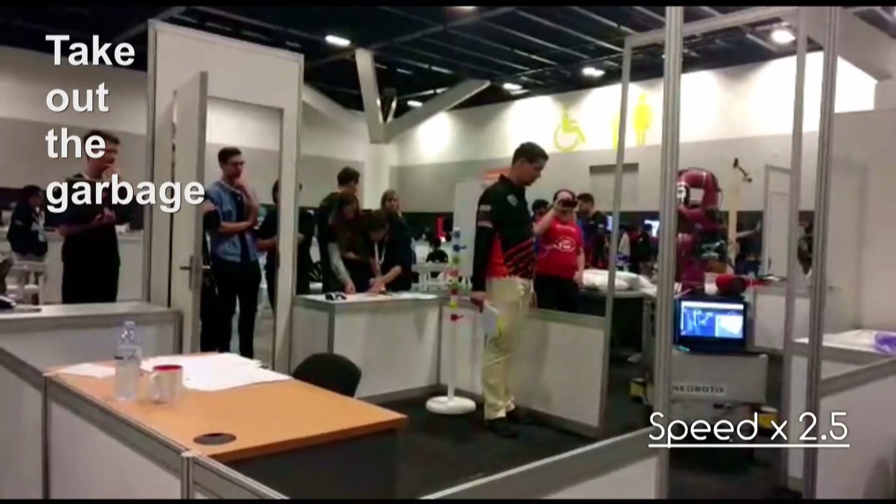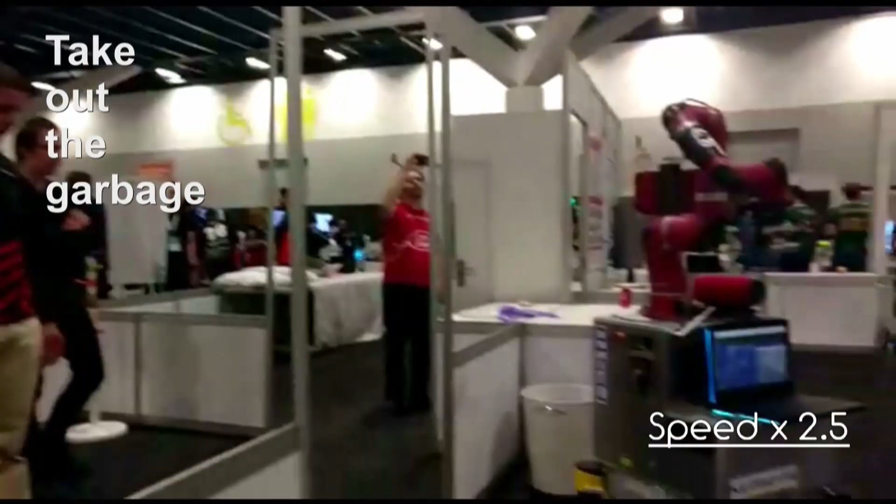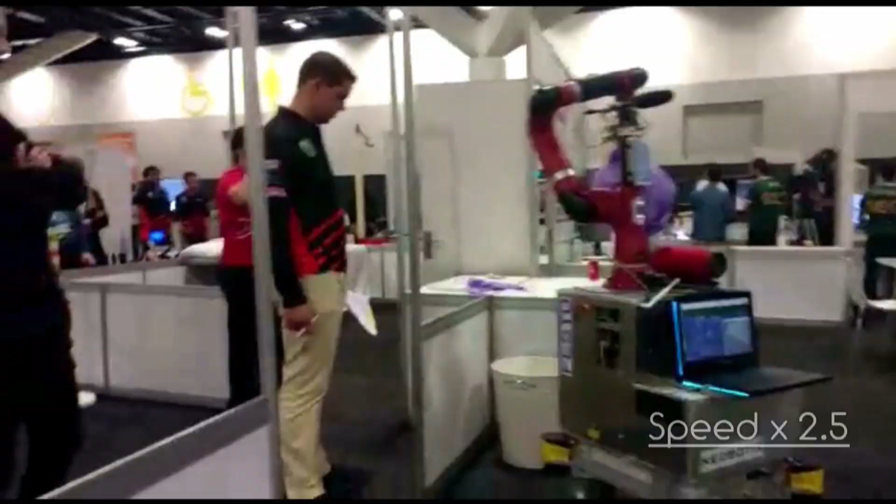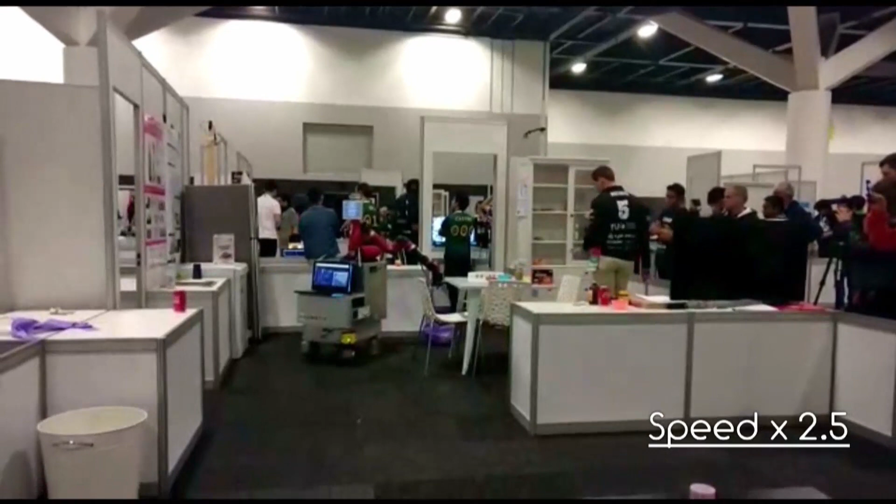This video was recorded in 2019 during the RoboCup World Cup in Sydney. Although our robot dropped the garbage once, he managed to recover from the failure and completed the task successfully.

The next task is carry my luggage, from the same competition.

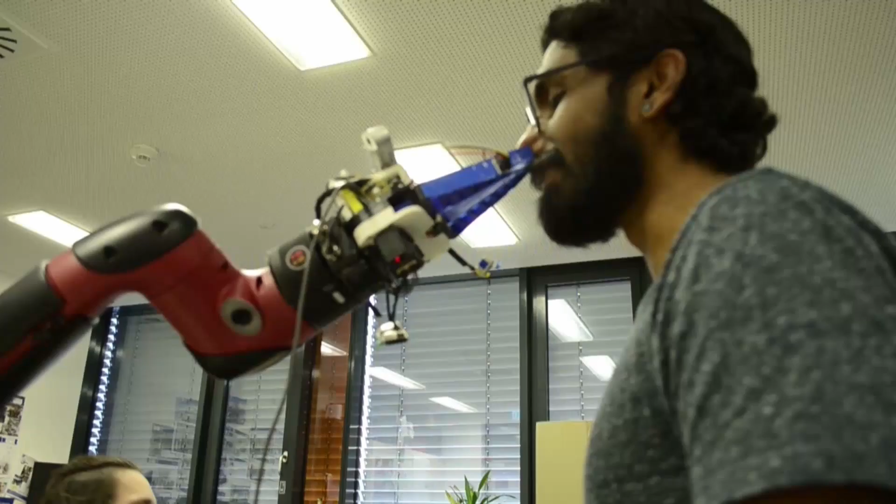Come on. Yeah. You did it. Awesome. Not yet. So you want to follow me, huh? I can push it back. Yeah, you have to push it back. Okay, 1, 2, 3. Give me back my nose!

I can follow you. Please stand about 1.5 meters in front of the robot. Are you ready? Then say yes. Yes. I will follow you now. Please start walking.

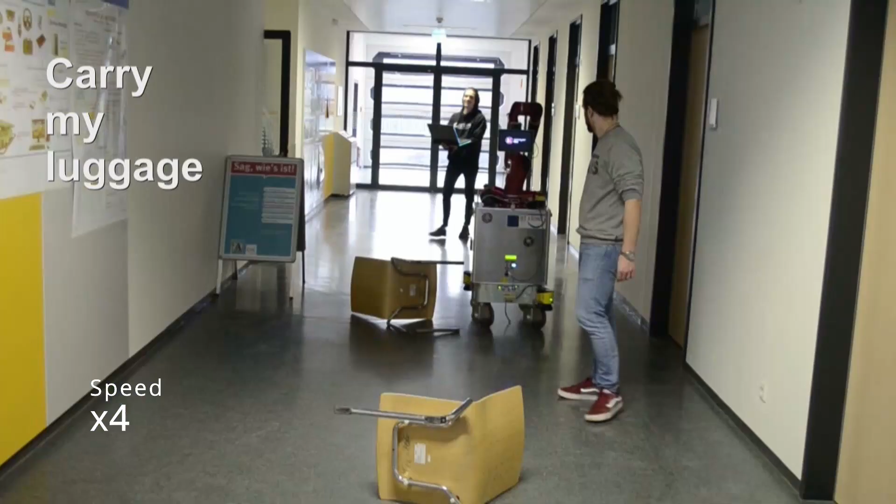Nice answer. Please answer with yes or no, and speak loud and clearly. Follow you. Please stand about 1.5 meters in front of the robot. Are you ready? Then say yes. Yes. Okay, I will follow you now. Start walking.

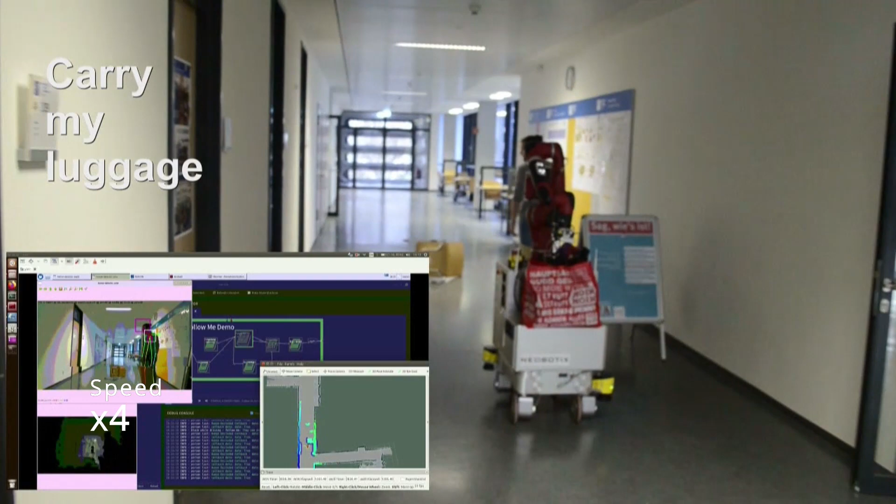Again, we kind of had some problems. The upside is there are enough things for us to optimize for RoboCup 2022 in Bangkok. In the next clip, you can see the Where Is This challenge.

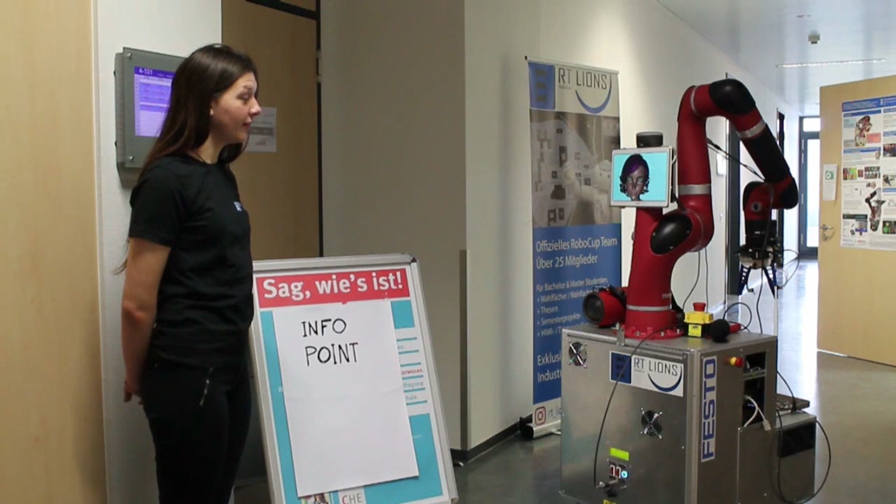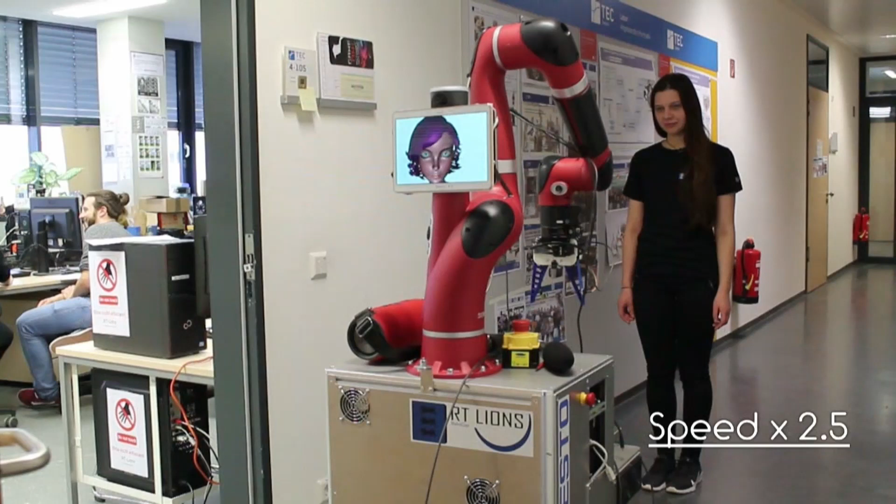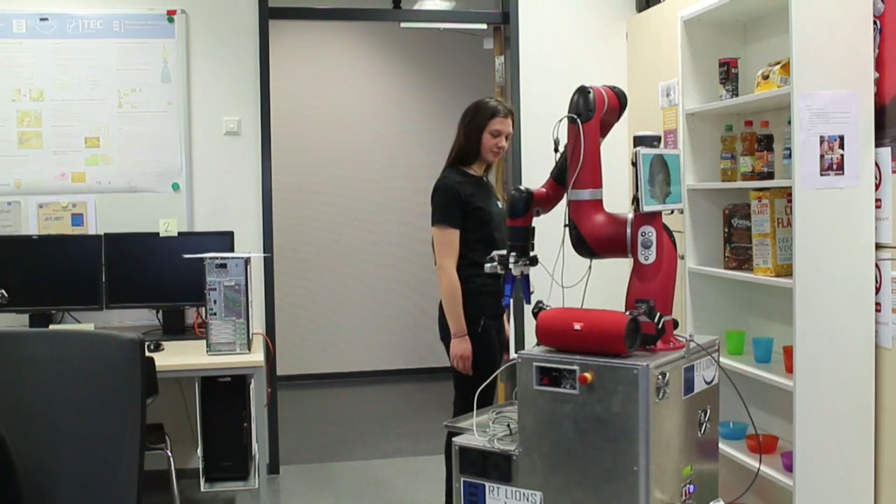Hello, my name is Leonie. Please tell me your name. My name is Carmen. Hello, Carmen. How can I help you? Where are the cornflakes? Please follow the hallway to the next door, on the right side. Then enter the door to the RoboCup room. There will be a shelf on the left side. The cornflakes are placed inside the shelf. Do you want me to guide you to the cornflakes? Yes. Please follow the hallway to the next door, on the right side. Enter the door to the RoboCup room. Ja. There will be a shelf on the left side. The cornflakes are placed inside the shelf.

Now, Michael will tell you something more about our team.

Hi, my name is Michael Denner, a team member of the German RT Lions RoboCup-at-Home team and research staff at the Department of Technique of the Reutlingen University. I would like to take 5 minutes to present our RoboCup-at-Home research poster.

In the beginning, there are 5 departments at our RoboCup team. The navigation team is for moving the robot from one place to another. Second, the manipulation workers teach the picking and placing of all kinds of objects. Then there's the perception team that uses cameras, microphones and speakers to interact with the environment. All modules are connected by the people working on the brain. This abbreviation stands for the best Reutlinger artificial intelligence network ever built. Finally, the assembly operators invent new hardware and maintain our robots.

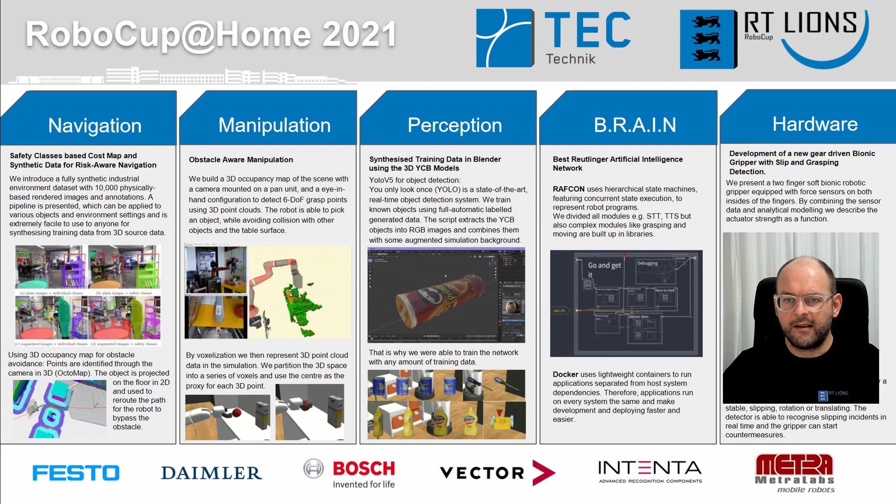Let's start with our research in navigation. For collision and obstacle avoidance, as well as trajectory planning, robots usually generate and use a simple 2D cost map without any semantic information about the detected obstacles. Thus, a robot's path planning will simply adhere to an arbitrary large safety margin around obstacles. A more optimal approach is to adjust this safety distance according to the class of an obstacle.

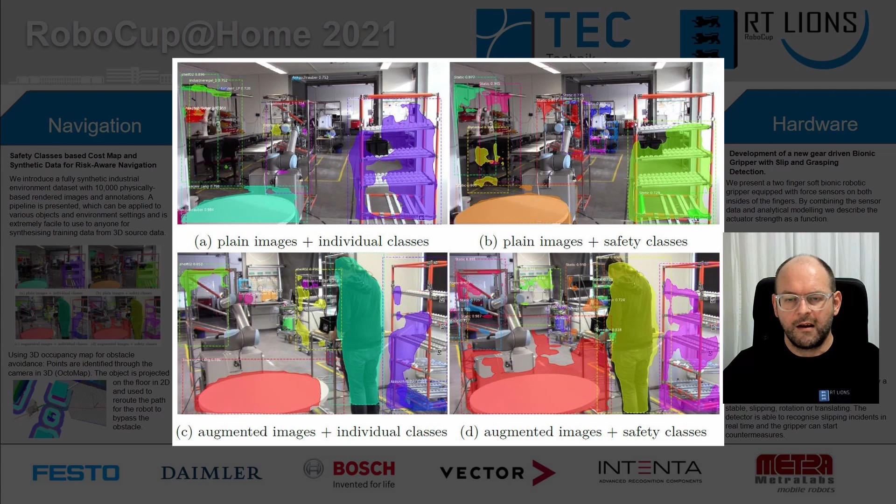For class prediction, we trained an image processing convolutional neural network. One of the main problems in the development and training of any neural network is the creation of a training dataset. We used methods and free open source software allowing a fast generation of annotated datasets. Our pipeline can be then applied to various objects and environment settings and is extremely easy to use for anyone synthesizing training data from 3D source data.

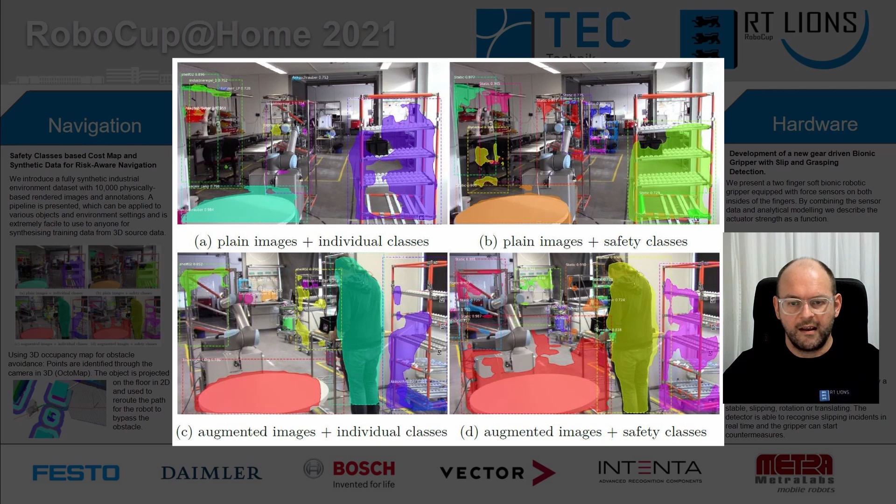We created a fully synthetic industrial environment dataset with 10,000 physically based rendered images and annotations. Subsequently, we trained a CNN with our dataset for cost map safety class prediction. We analyzed different class combinations and showed that transfer learning the safety classes end-to-end directly with a small dataset, instead of using a class lookup table, improved the quality and precision of the predictions.

We proposed 3 different class groupings on our dataset for our experiments. First, all dataset objects as their individual class. Second, similar objects grouped by type classes. And third, objects directly grouped into safety classes.

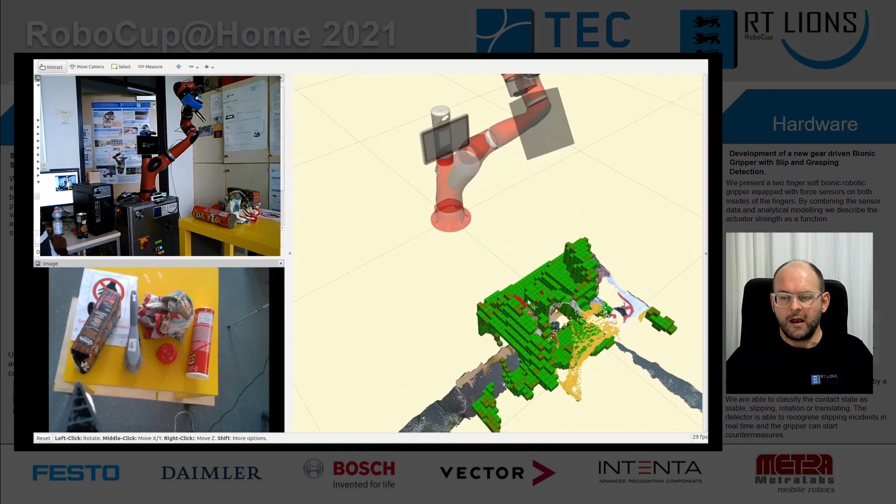The manipulation team works on a novelty for picking up objects. We generate volumetric 3D environment models with Octomap. The error in range measurement is usually very high, and therefore an updated environment mapping in real time is necessary. Octomap is an integrated framework based on octrees for the representation of 3-dimensional environments. We use this new method not only for navigation but also for gripping tasks. Hence, this also supports the gripping point detection and orientation of the objects.

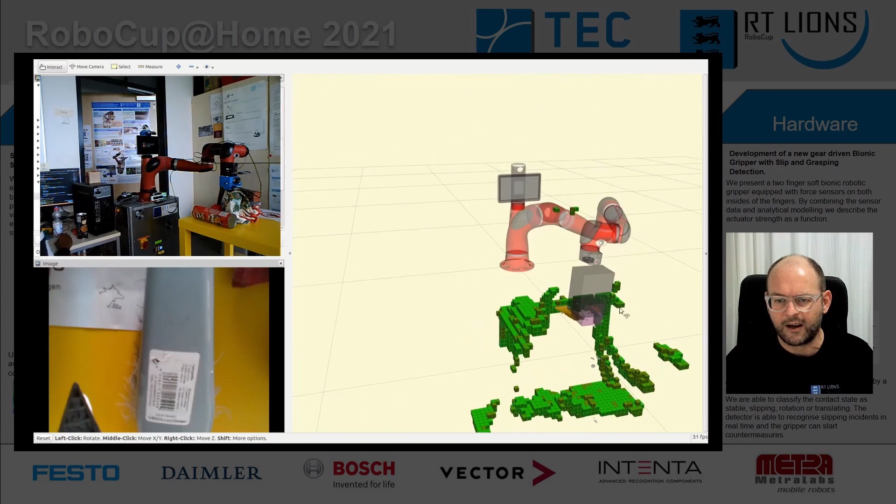In parallel, the team had also to handle the simulation challenges of picking a virtual object with a home service robot. Many experiments and trials took a lot of time, and finally there have been more and more successes.

The perception team worked on synthesizing training images in Blender. The fully automatic script is able to generate thousands of RGB images in a few hours. The objects are then extracted and combined with an artificial background that corresponds to the simulation arena. In this step, the labels and positions of the objects are also stored.

In a second approach, an arena scenery has been built in Unity 3D, including random YCB objects in the shelf, on the table or on the floor. Again, the labels are also generated by Unity. Therefore, no manual annotation had to be done for this year's challenge. The training data then was trained on the darknet YOLO network, and we achieved a high recognition rate.

Our brain combines all modules and orchestrates all states of each challenge. The tool we used is called RAFCON, that supports the creation of state machines for robot programs. The specialty of RAFCON is the graphical interface, the hierarchies of state machines, and the integration of internal and external Python code. The communication of the modules was done by ROS topics and messages, and this is also controlled by RAFCON. Additionally, the brain is in control of the Docker containers and the applications inside the containers.

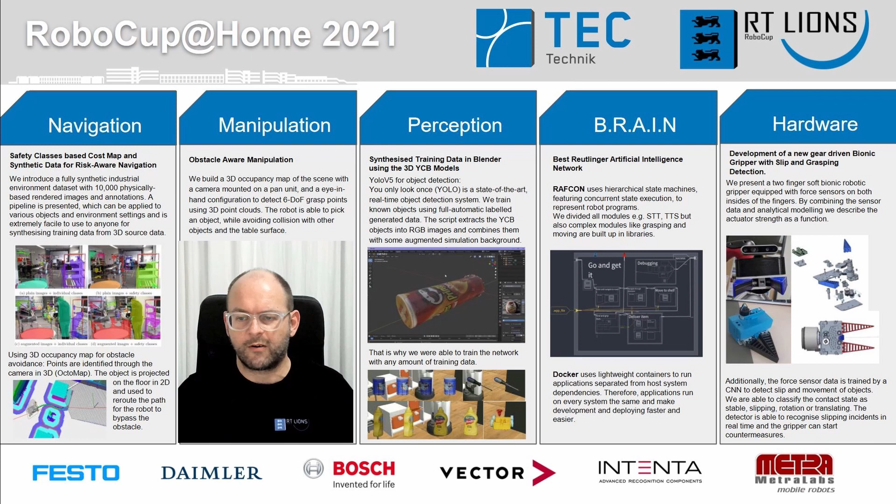Last but not least, the hardware team worked on a Bionic Gripper with slip and grasping detection. Together with Festo, we built a soft Bionic 2-finger gripper with force sensors on the inside. Thank you very much for your attention.